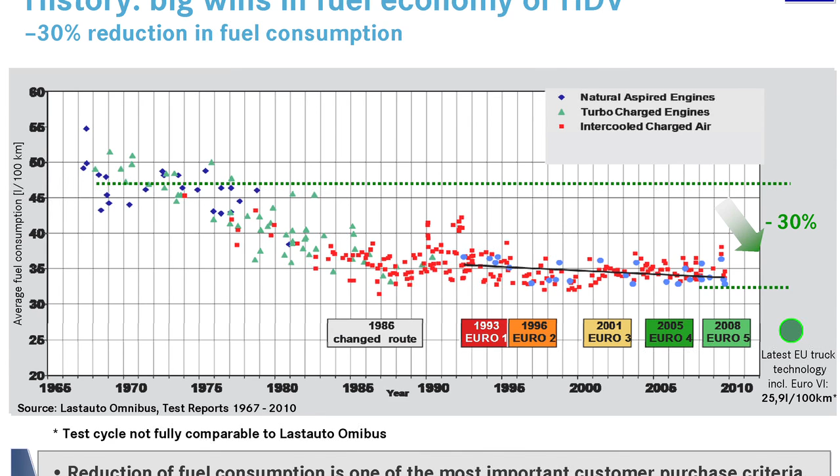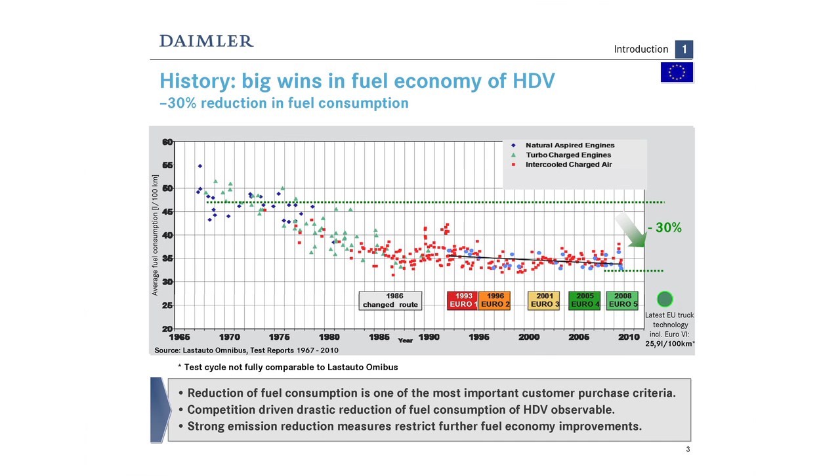And I think that shows the dilemma already. What are the comparable cycles? It's clear we can show today a truck with 40 tons of less than 26 liters in Euro 6 technology, but the same truck can even easily have a fuel consumption of about 30 liters. So the dimension really has to be developed in terms of what is the right long-haul cycle, and this is certainly a task we all have here in Europe. Not only the manufacturers, I think more important the regulation side.

Next slide. We often discussed today and in previous meetings, is competition working? At least from our side, we believe, yes, it is working. We've just taken up a comparison from what we call in Germany Lastauto Omnibus magazine, which is one of the leading magazines in Europe with regard to trucks and buses. And what you see is between the worst and the best is just around 4.5% difference in fuel consumption.

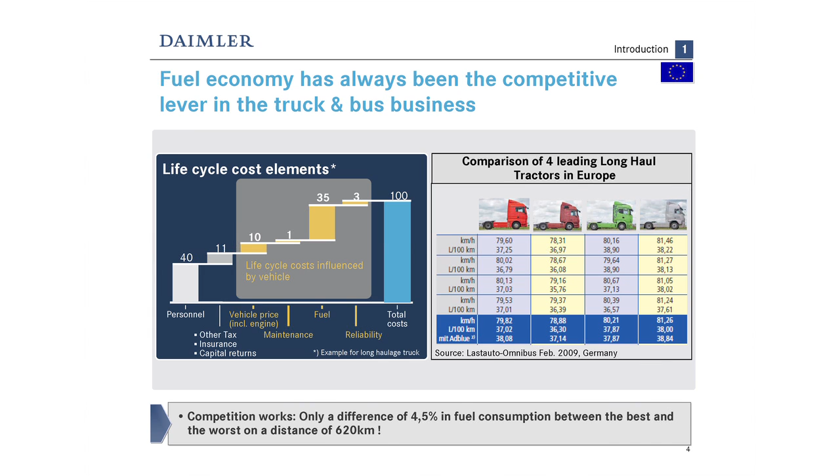And there are other comparisons where even between the worst and the best it's just only 2%. So that means for us it's very, very competitive, and you can see easily once a new truck is coming up, this truck is leading and the other manufacturers have to follow immediately, otherwise they are out of competition. Because, and this is the left side of the graph, the fuel is so important in Europe.

We count roundabout an average of 35%. There are markets in Germany, in Europe, like Germany, where you have very expensive drivers, then the fuel costs are a bit less. But there are other markets where it's much higher because the drivers are much cheaper.

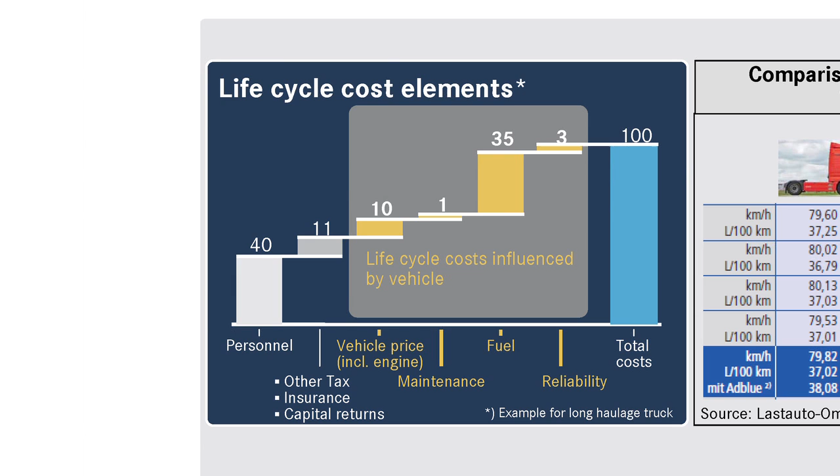Next slide. We have seen, and that really was surprising to me on one side, but I'm very thankful for that, these activities in Japan on the integrated approach. I think we have to deliver all potentials and not only focus on the vehicle itself.

In 2010, we made a comparison between an old truck, what we call an old truck, model year 1965. It was hardly be operated, and to be operated was very difficult, and the drivers didn't like it because they know what the advantages of today's trucks are. But we took them, both vehicles.

You see the LP 1620 is on the left side, and on the right side the latest version of the Actros at that time. We took those two vehicles fully loaded over the Alps, both forth and back to Milano, around about 1,200 kilometers.

What you really see is the driving time on the left side, 20 hours, and on the other side 15 hours. The average speed was 58 kilometers, and on the right side 76 kilometers. That is really an advantage for the society - that is not raising the costs, that is reducing the costs.

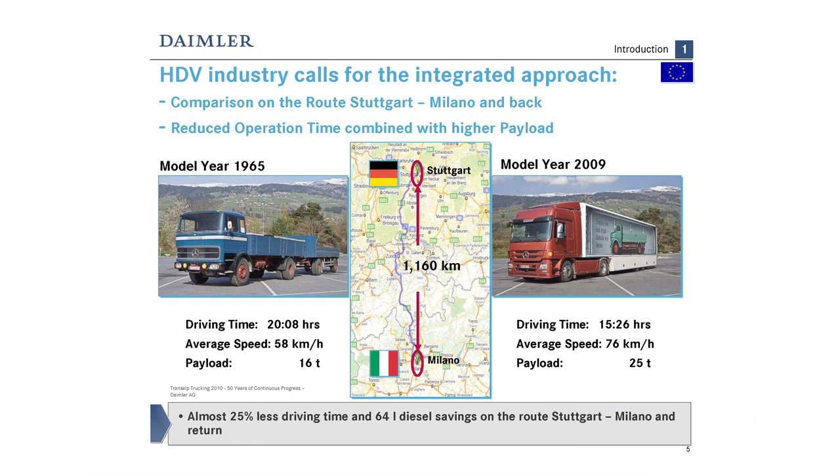If you take into account the payload, on the left side 16 tons and on the right side 25 tons, that really shows what we have achieved during the last decades. That was clearly because we were able to raise the payload by a certain amount of tons, and we were able to raise the speed for the advantage of society because of getting the transportation costs down.

If you then calculate the results, you see on the left side, starting with fuel consumption, for some reasons during the measurement procedure it came down only about 15%. We believe it's a bit higher, but for those measurements it was not so easy to take them because sometimes the old trucks had to be stopped and so on. But anyway, 15%, we've taken this number. We reduced from 37 liters down to 32 liters.

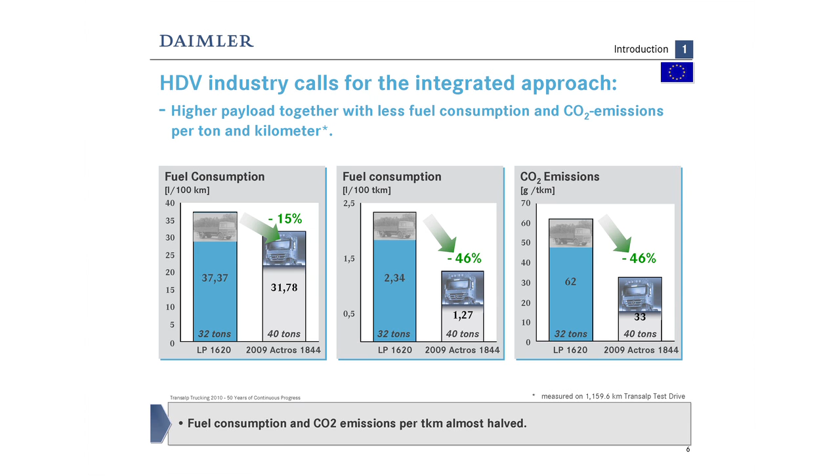But then taking into account the fuel consumption per ton, as you see in the middle graph, it went down from 2.3 liters per 100 ton kilometer down to 1.27 per ton kilometer. So we were able to reduce per ton, per transported ton over that period and distance, by 46%. We were nearly halving the total amount of fuel consumption and CO2 emissions. I think that really shows what we have achieved by taking the integrated approach because of getting higher payload in. That was a success in that respect as well.

Coming more to the regulatory activities around the world, I think it's not necessary to go into every detail. We've got brilliant presentations this morning on China, Japan, and the US. More important for us here is really the left side of the graph, the timing period. If you look at what the American standard is focusing on, it's clear 2014 to 2017, and then it's lasting usually for 3 years. So by 2020, and it is written in the regulation, a phase 2 program is starting, or should be starting.

If you go to China, we have heard that by the end of 2013 there should be a national standard in place, but that's for, at the moment, at least to our knowledge, 3 different categories, maybe more coming up. So once we have learned, it's clear that towards the end of the decade, more or less all segments might be in those standards.

We have also heard that Japan has a regulation in place started 2015, but we have also heard that they are tightening the standards, or that discussions on tightening the standards are ongoing. So that means by 2020 there is another possibility. And then it's unclear what we are doing here in Europe.

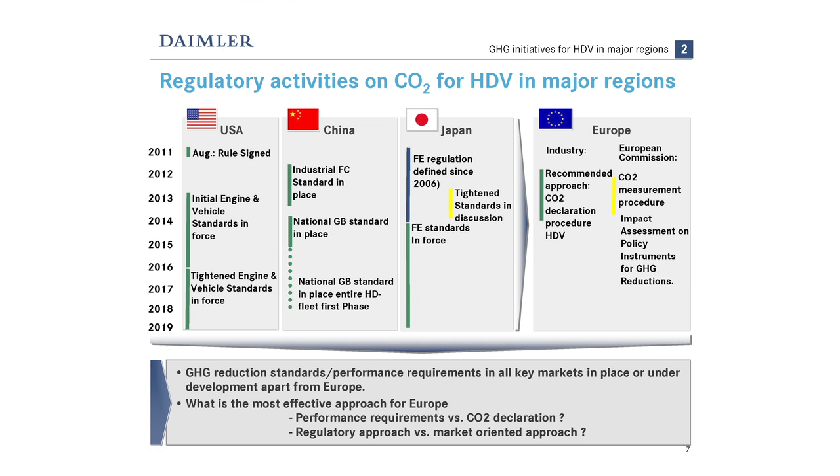A CO2 measurement procedure might be one aspect. You know that we believe in ACEA that we should have a CO2 declaration procedure, something like that. It will turn out somehow, but there is, I think, a really good chance, and this question has been raised today as well, that by the end of the decade there could be a harmonized act on all of that. We should really work towards that, taking the possibility of really harmonizing the most important parts of all those components we need to improve the fuel efficiency of our vehicles.

Because in the situation where we are today, we are customer driven. Today we are optimizing, and Byron mentioned that the customer comes into our shops and there's a discussion ongoing about what is the best drivetrain, what is the best shape of the truck, and then we optimize it according to the different specifications. Once a regulation is in place, and if the regulation is not carefully developed, then we have to focus first on the regulation. All of our experiences so far are clear on that.

On the passenger car side, we have two different activities. One is, first of all, following the different cycles and showing the customer the results on the basis of the cycles. But we also speak about what is the real life consumption of the vehicle. I think this is the same here for trucks, or even more important, that we really keep an eye on that.

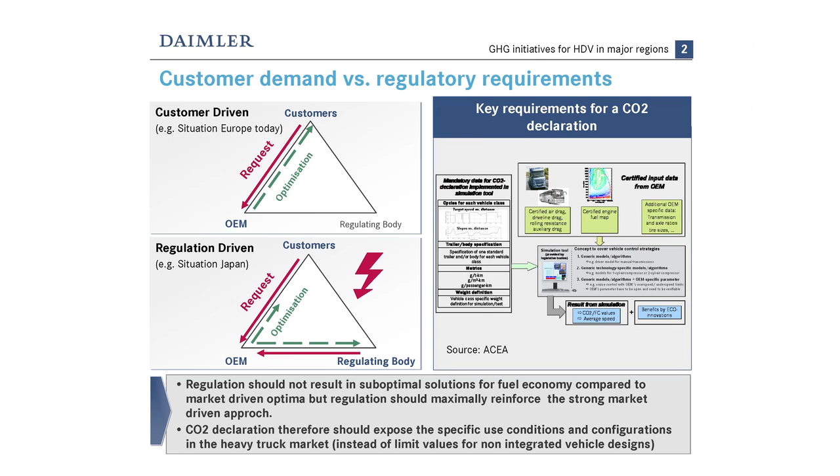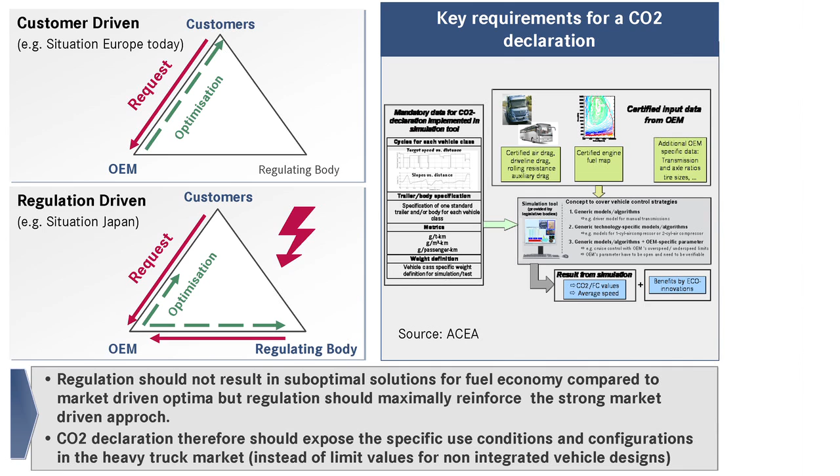If a regulation is in place, it should not jeopardize the results and the effectiveness of the customer-OEM relationship. For that, it's really our belief, and we work on it very hard, that a CO2 declaration procedure should give the customer a comparable result of the efficiencies of trucks from different manufacturers for the same configuration, in a short and acceptable presentation or simulation, giving the chance to decide later on. That's really very important for our business.

Going more into the details of the different measurements and activities, I wanted to present a short overview of the key factors and criteria of the regulations. In the US we have a gram per ton mile approach. In China it looks like we get a gram or liter per vehicle kilometer. In Japan we already have a gram per vehicle kilometer, and in Europe we believe the gram per ton kilometer should be what we focus on.

In the US, as Byron said, we have a separate engine standard and a vehicle standard, so we have to handle that differently. In China we're working on a chassis dyno testing procedure for the key type, then a simulation for the variants. In Japan we have a simulation based on a drivetrain measurement procedure, and in Europe we propose a certain procedure which should be used as a blueprint, maybe.

Simulation input data are very important in that respect - where they come from and how they are measured. I think this is very decisive, and later on it's very important to get a segmentation and cycles which cover the broad industry, so that fuel efficiency improvement can take place.

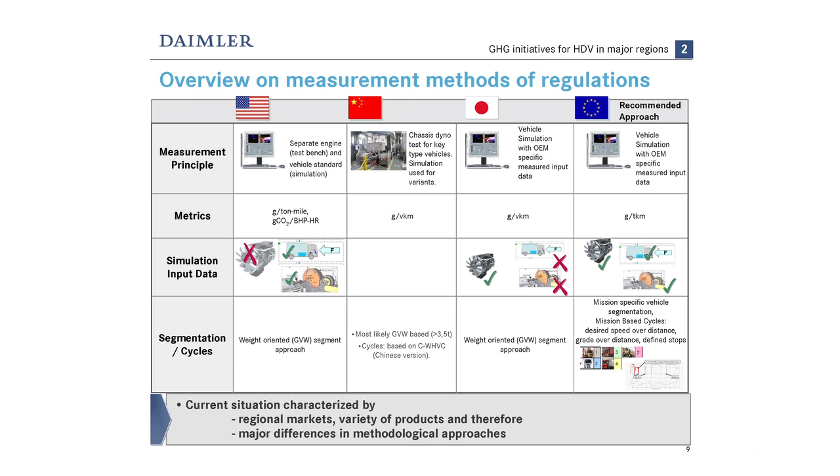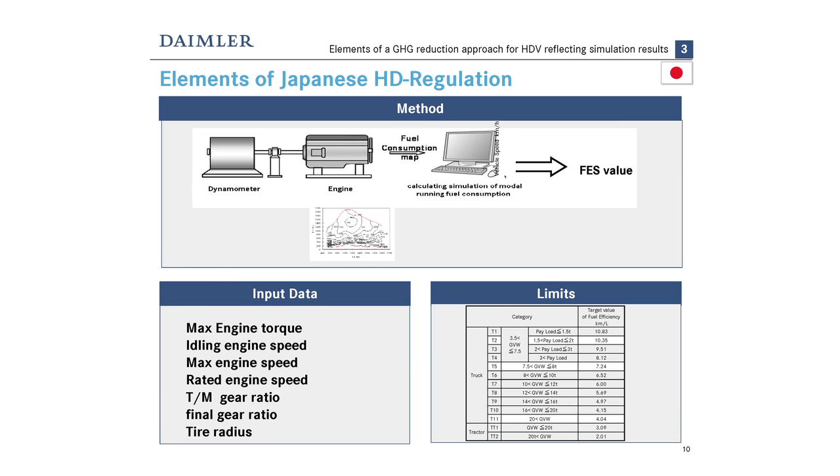I would now focus on the simulation results, highlighting the situation in Japan. You see that the bottom line of this approach is that you have to measure your engine on an engine dynamometer. You use fuel maps and some other information from the specific vehicle, but aerodynamics and rolling resistance are used from default values, so it's mainly focusing on the engine. This is certainly one of our limitations as well - let's go to the next slide.

It's one of the limitations from our side, because once you improve the vehicle as a whole, as a manufacturer you can select what is the most efficient approach. But when the standard only focuses on the engine, you just have to focus on the engine. All the other possibilities are not really effective. The one who puts the most effort into the engine is the winner, and the one who optimizes the vehicle, maybe in a much better way for the benefit of the customer, would be the loser.

So in that respect, if you take the Euro 6 engine from our European experiences and put it into the Japanese tool, you see that we can fulfill the requirements of the FES standard in Japan. That more or less tells you that in Europe we could get the fuel efficiency standard 2015 already today.

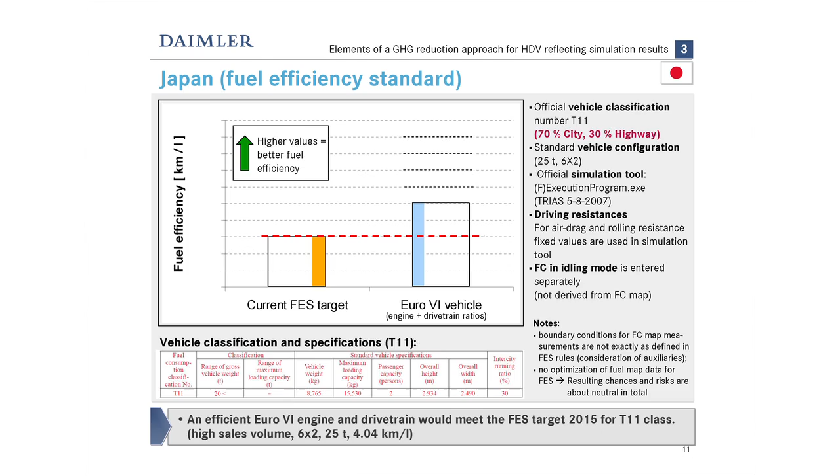There are many limitations and boundaries to mention. In that category, T11, it's 70% city and 30% highway - this is certainly not what we optimize our engines for. But anyway, it shows that even under those restrictions, our Euro 6 engine is better than the current FES standard. Next slide.

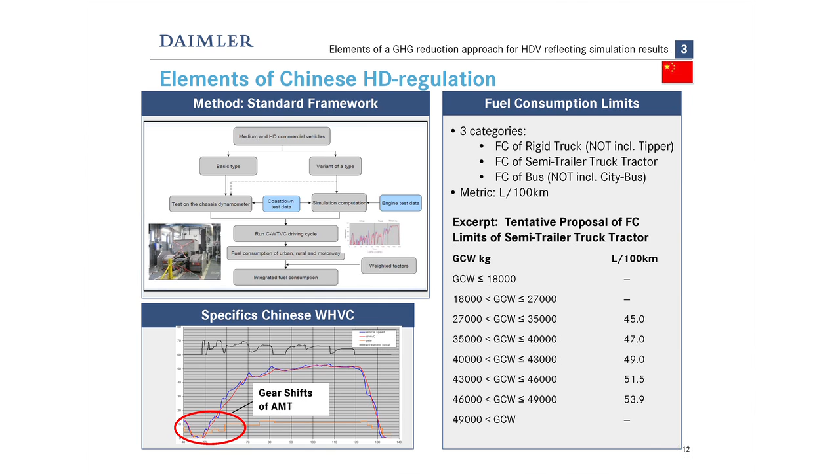Coming to the Chinese activities, you've heard about them. On the right side you see the limits, the proposed limits for the moment - we don't know whether they're final, but these are the proposed limits in this tractor-trailer category. You see our categories here in Europe: less than 40 tons, the limit is 47 liters. As said, we had to simulate that. If it were a key type, we'd have to test it on the chassis dyno, but we simulated it - maybe in the next slide you'll see the results.

You know that for the Chinese activities in that category, they propose 10% interurban and 90% highway. You see that Euro 5 and Euro 6 engine, the current Euro 5 vehicle and the Euro 6 vehicle, and what you see here is in a combined cycle we would achieve a fuel consumption of around about 37 liters, and the target right now is 47 liters. So we are well below the target.

Certainly, I think it's clear this is a European vehicle. The Chinese WHVC is a bit restricted in terms of power demand. That gives us certainly some better efficiency. But anyway, I think the overall results should show that we are much better than the current limit, although it's clear it's European technology.

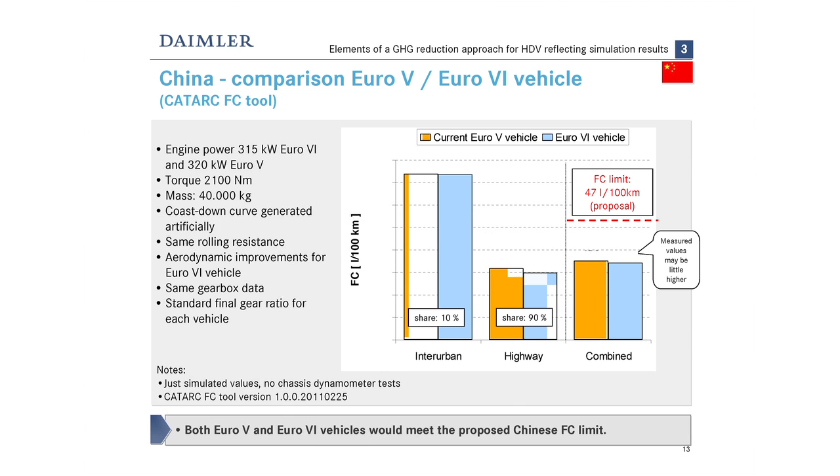Coming on the US standard, I think I could talk very long on that, but what has not been mentioned today is really that we are now in a situation that it's not only on the truck manufacturer to fulfill the standard, it's more on the choice of the customer.

If we focus on what we can do to optimize our vehicles with regard to aerodynamics, I think that will definitely be done, but it will not be enough to fulfill the standard. So we need the right choice of tires from the customers. We need somehow a take up of idle reduction. We need certainly somehow take up of weight reduction, and not to speak about the speed limiter.

It's clear, it's more than ever that the customer takes it, and if the customer doesn't take it, then we have to restrict, in a certain way, the equipment of the vehicle, so we must force the customer to take it, otherwise we would not be able to fulfill the standard.

So it's really a new element. The customers were used to have all those activities on the engine side. This is not very new to them because they lived with EPA 04, 07, 10 and so forth. But now, in this situation, really in such a short time to convince the customer that he has to take these tires, and that he has to take some idling reduction and speed limiter, this is new to them, and we hope that it will be fulfillable, but it's a certain challenge to us.

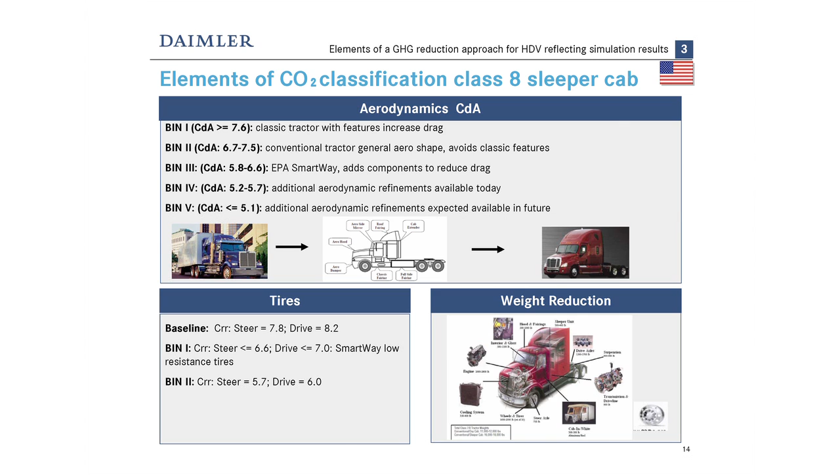Another thing is certainly if you focus, for example, on the speed limiter, I think it's clear if the customer takes the speed limiter up, and we just spoke about it, as far as mileage driven, then if you reduce the speed of the vehicle, it will take longer for him. So he has to work longer for more or less the same money, if he drives the same distance. This is certainly a challenge, and we will see whether the customers will take that up.

And then the next slide really now comes up to the simulation results. Again, it's not very easy to understand, and that's the reason why I'm staying a bit longer on that slide. There is a baseline in bin 2, so to say, standard, and 2014, and then where the US trucks are, to our opinion, more or less today.

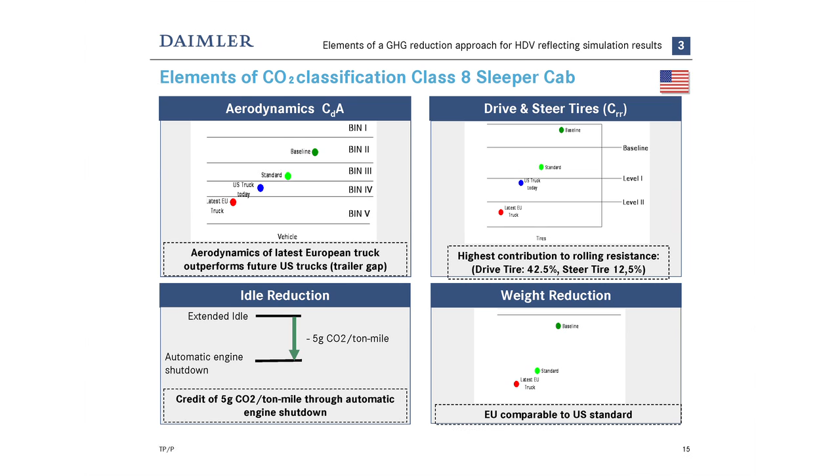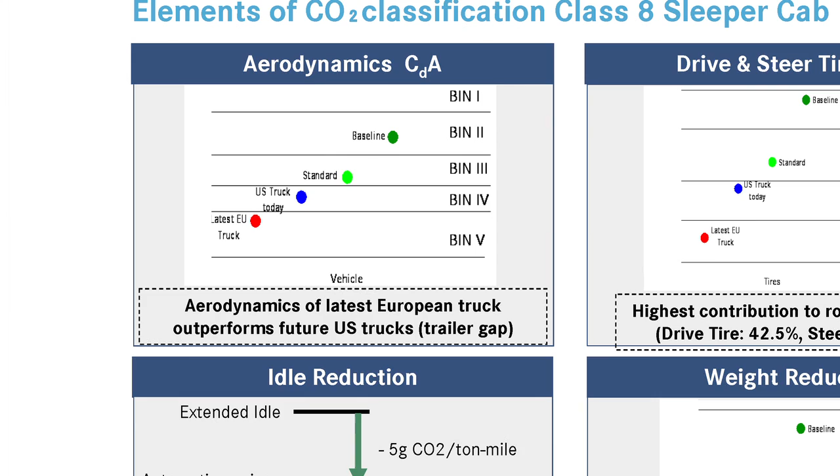You see the blue point, and it's clear, and I really would like to outline that the aerodynamics of our US trucks are better than the referring European trucks. This is not to be doubted, but if you take into account the huge trailer gap, then all of the improvements of the shape and aerodynamics of the tractor are more or less compensated by the trailer.

It's very seldom that I'm in line with yours, but this time I think I'm absolutely in line. We have to improve the situation on the trailer side, otherwise the fuel consumption will not go down in that way. On the right side you see the tires.

I think Byron mentioned it. Yes, we had to learn what is the rolling resistance of our tires. Some of them we knew, but certainly not all of them, and I don't have the exact numbers of tires in the US. In Europe, I know we have 2,000 different tire sizes in our plant in Wörth. So 2,000 different. I think that shows really the challenge to us, and shows also the challenge to the tire industry, because we fully rely on all those measurements from the tire industry.

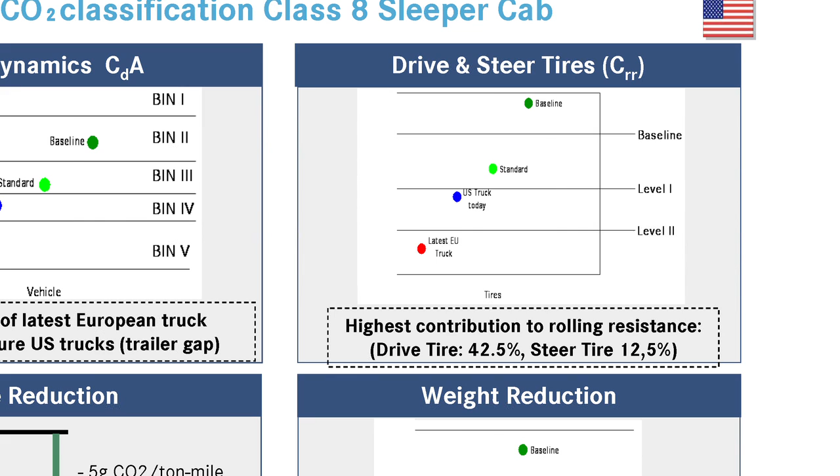We checked that with our tires we are using on our European truck, and I can tell you we are right now much better. I think the other points are not really so surprising. If we have idle reduction capabilities, we have all the components on board. We don't need to idle the engine, what you have in the US, and the weight is not so important. So we are comparable, I think, to the US standard. Next slide.

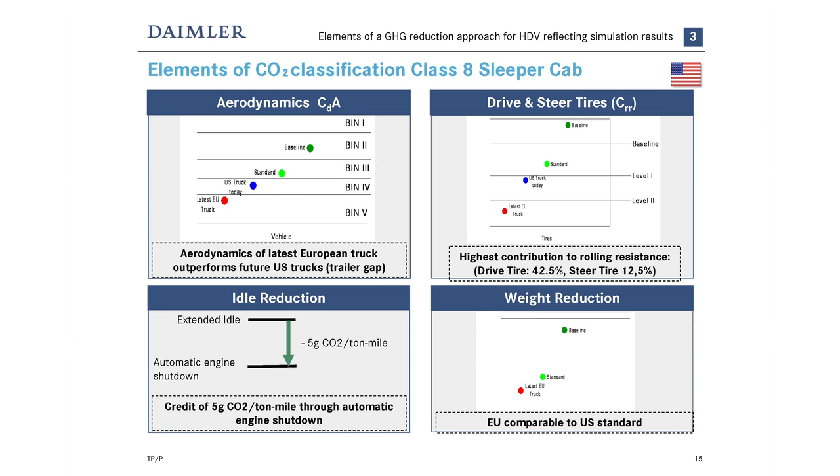Coming to the engines, I think this is one of the challenges, and what we've tried is really a differential picture between the Euro 6 engine and the EPA 10 engine. With all those restrictions, it's clear that the EPA 10 engine has somehow a bit stricter NOx standards to be fulfilled. Euro 6 is a bit less stringent than EPA 10, the cycles are different, and so on. But keeping that in mind, we can still say that at least the Euro 6 engine is absolutely comparable or even a bit better than our EPA 10 engine. I think this is the message of that picture. And as you know, 2014 is our Euro 6 time, and we can show that we are on that track as well.

One word on that is really important to say. The best point, the peak point of our engines right now, and they are all manufactured quite close together, is around 46%. 45, 46, this is the value we all know. And it's very, very difficult to go up to 50%. Byron mentioned this super truck program. We all strive for that, but it's still on a prototype basis. It takes a long time and a lot of money to get from a prototype standard up to the series standard. So we should be very cautious with applying 50% or even more towards 2020. Although we know that if we improve 1% in engine thermal efficiency, that has to be counted by 2, so it gives you around 2% improvement.

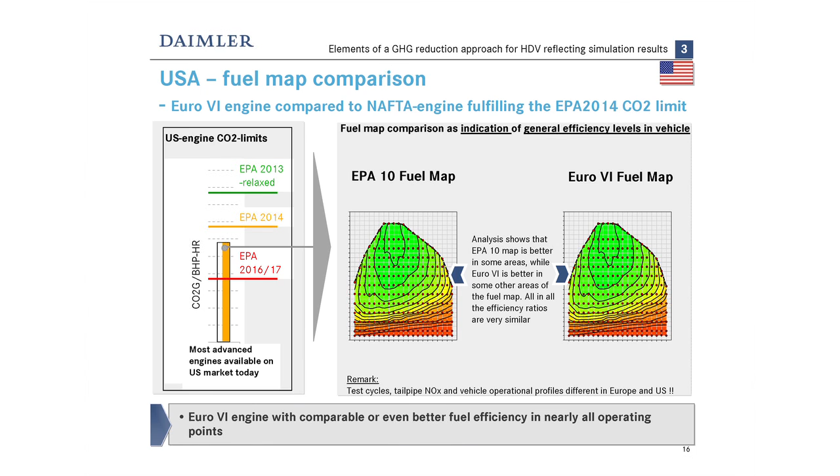And finally, next slide please. It's the fact that if you take everything together and go for the EPA 2014 standard using different specs, some specs are not fulfilling it right now. In the US, some are better, some are much worse. I have not shown them, but I can tell you, and this is more important, if we use all the boundaries given by the GEM model, this is very important, and all the limitations, then the latest EU truck technology goes down to 56 grams per ton mile.

But saying clearly, the US trucks are used at 65 miles per hour speed. We are using 55 miles. This is certainly a bit different, and an important difference, but Michael already showed roughly that if you take all the differences into account, it's easy to count that there's a 20% difference between the US and the other ones.

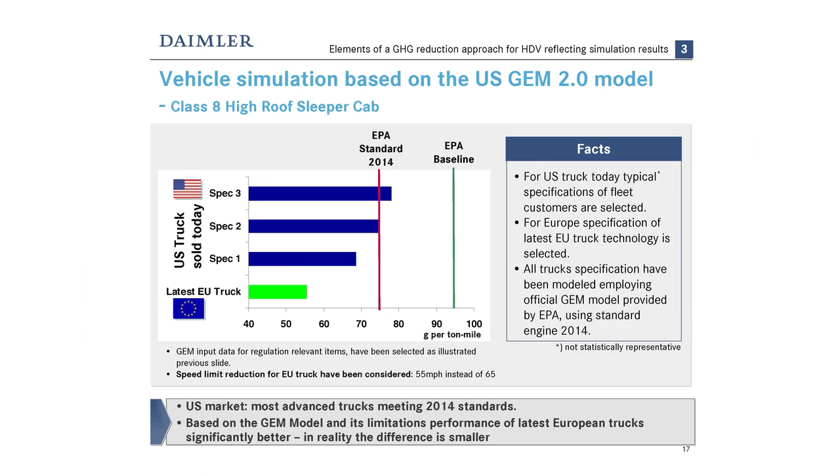And that goes then to what is really possible, and we could shortly outline that. You know that in the Lot 1 study made by Ricardo, there was also an overview of the technologies which are available or which would be available. And I think just running through, electric vehicle and a start-stop system for long haul doesn't really make sense. It's clear the battery would fully take up the payload, and there wouldn't even be 1 ton left to carry the goods.

And then there are some yellow dots for a full hybrid. I agree, technically it's possible, it's not a question, but the question is really how cost effective that is. And for today, at least to our belief, it is not yet cost effective. Maybe battery costs will go down quick enough, and maybe our customers will accept that the lifetime of such a drivetrain won't last for 1.2 million kilometers. Then we might see that a bit sooner, but right now it's really not a cost-effective technology.

And on the other side, many of the technologies used for 2020 in the Ricardo summary are already in our vehicles. So we can't get this potential again because they are already equipped into our vehicles. So from that perspective, I think we have to be very careful about what the technology improvement rate is, and most important, what the reduction potential really is.

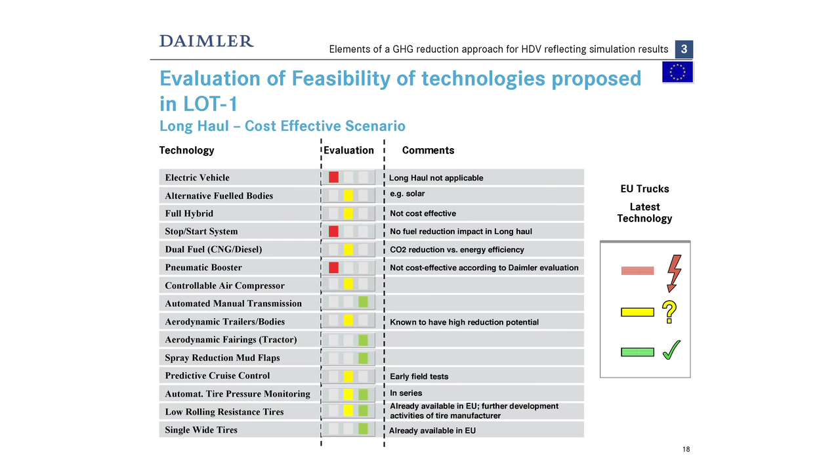Next slide please. That brings us back to what is really possible. One thing is certainly what we mentioned already, this measurement procedure and the declaration procedure. We believe this is really a big step forward, but there are other points in vehicle operations.

We had yesterday a lady from IKEA there that many things are done already, but there are a lot of things possible, and we need to focus on that as well. Driver training is a very, very important thing. We have equipped our vehicles with a driver information system, but there's still a lot of potential in it.

So driver training is a very important thing. Alternative fuels, I know that the Commission, at least a part of the Commission, doesn't like the biofuels, but it's an issue. There could be a chance really to improve the overall situation. New vehicles is one point, replacement rates, especially in the delivery sector, vehicles are becoming older and older because the economy is not very good in that business. But exchange of old vehicles to new vehicles would be a good thing or a big thing.

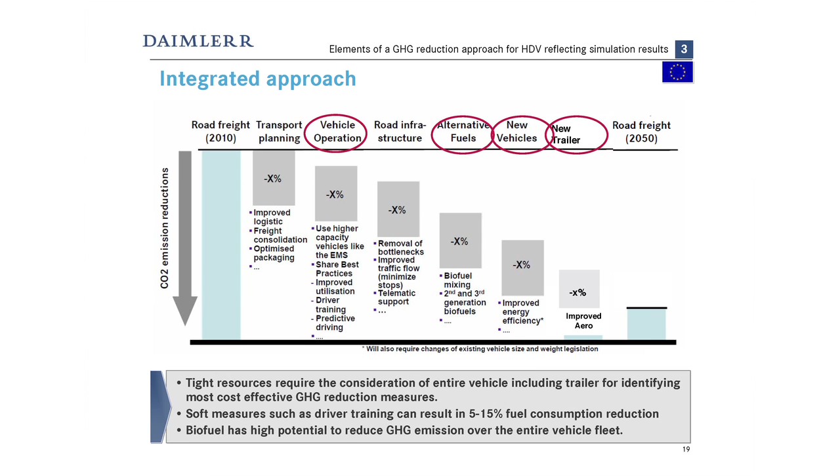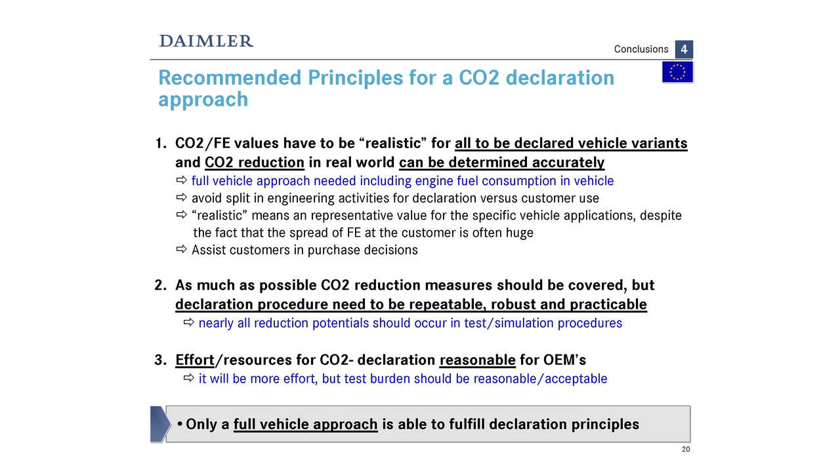But as said, the trailers are really one of the potentials which could be leveraged much, much faster. Looking a little bit on the time, really the recommended principles, I think it has been discussed today. We need something where the customer really gets a better picture on the entire system, and for that a simulation procedure with measured input data would be a good chance really to inform him. Next slide.

Why are the simulation tools so different? Why do we need really to measure the specific engine and to show that—shouldn't we integrate the engines into the entire vehicle system? This is how we optimize. We have different metrics. As said, some of them are using gram per vehicle kilometer and the other one is using gram per ton kilometer, and so on and so forth. I think there are huge possibilities really to optimize that.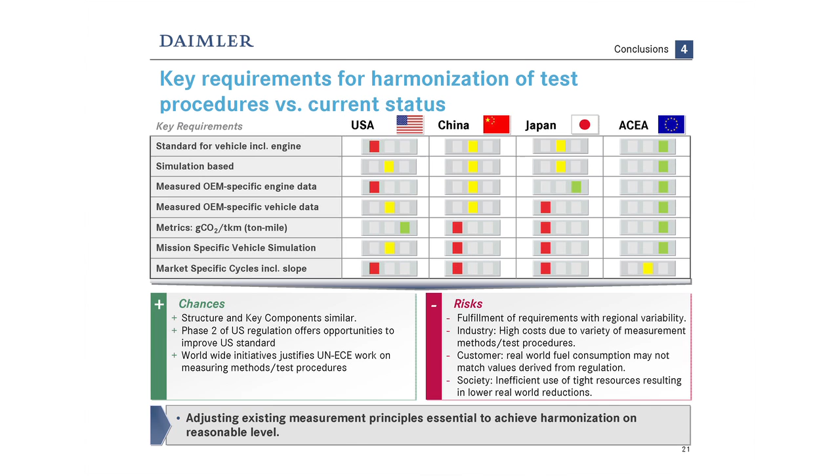And if you show the next slide, please. Then it's clear that harmonization of those activities could really be to the benefit of not only the customer, but also for the society, and finally also certainly for the truck manufacturers, which have to provide all the money to develop those vehicles. What can be harmonized?

One thing is certainly the cycle definition. We do not talk about that we should harmonize the cycles. This is definitely not the way we want to go forward. We need to find a way that we need to integrate the slope. We need to integrate load, and so on and so forth. In some markets, we see that we have a speed over time vehicle definition. This is not what we really need for our improvement of the heavy duties.

The measurement methods, I think, could be harmonized. How to measure the aerodynamics, I think this is equal for all of us around the world. Tires, we still have different tire standards. The fuel maps, how to do them, I think could be harmonized, and so on and so forth. The simulation tools—it's clear everybody wants to develop its own simulation tool. I can understand that, but isn't that for the benefit of the society? Question mark. You can give the answer.

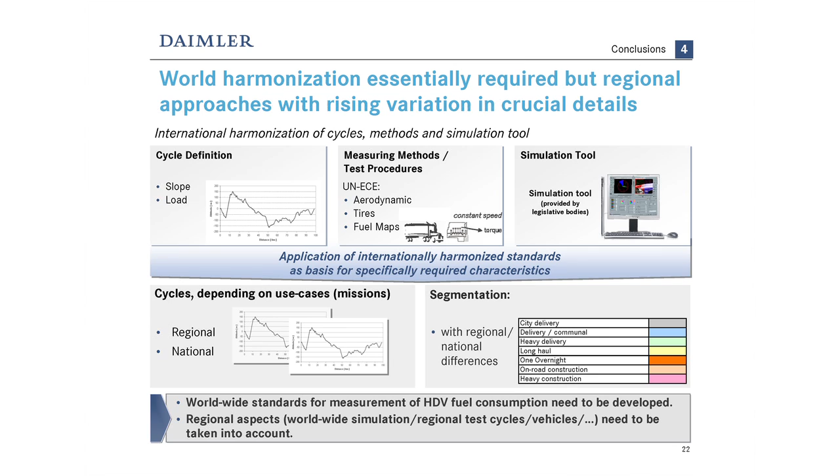Yeah, then coming to the end, I think all simulations have shown that Europe can compete with the other markets. There is not really a market which is much better than the European vehicles. We have given full attention to improve the fuel efficiency. As said, it was the nature because of the high cost share in the total cost of ownership. The ACEA approach of a certified declaration of fuel efficiency offers the customers the guidance in terms of real-life results. And as said, this should not be underestimated.

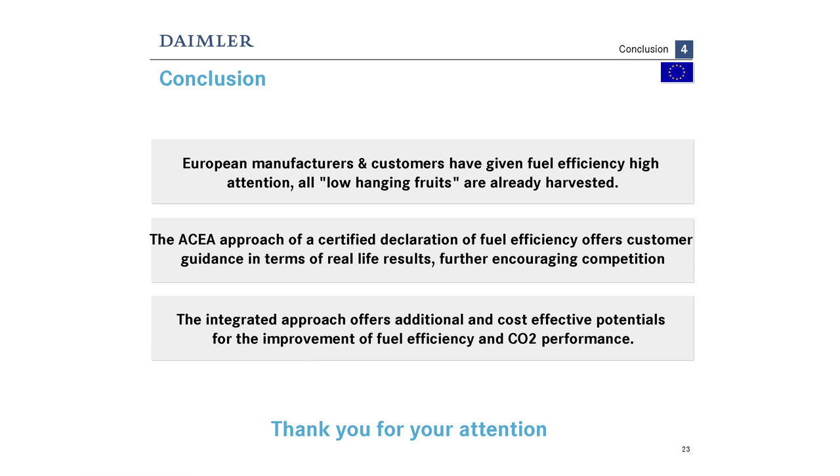Don't forget, trucks are not just bigger cars. Trucks serve our society, and everybody of us is affected if freight costs are rising. In these days, more than ever before, we must make sure that everything what we do is cost effective.